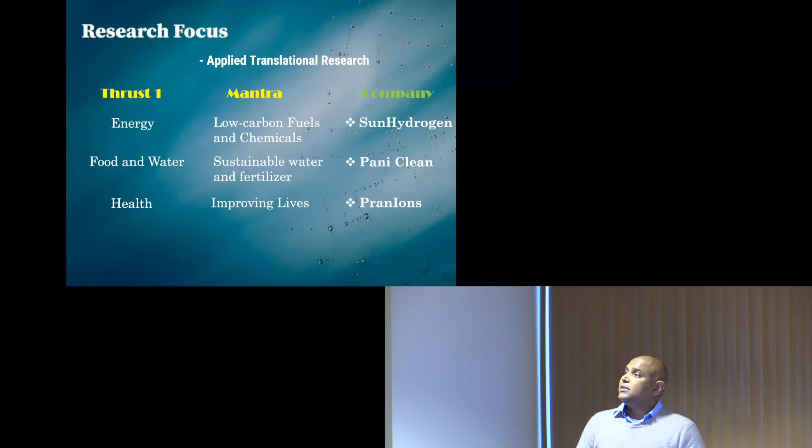So before I jump into the main topic of today's talk, I just wanted to advertise some of the things that we do in our lab. The lab is highly focused on doing applied translational research, and so we work on three thrusts.

I would say 50% of the lab works on thrust one, the energy, trying to make low carbon fuels and chemicals. The main focus there is hydrogen, and we have tried a little bit on some other chemicals like bromine and formic acid, but not much traction was received, so we stuck with hydrogen. Thrust two, the food and water, I would say 40% of my group works on that thrust area, and the goal there is to make sustainable water and fertilizer.

And the third, which I tell my colleagues is a mistake because I shouldn't be working on health because I'm terrible with biology or anything related to health, but I'm convinced that some of the skill set that we have in our lab, mainly the use of electricity to drive chemical reactions, can be used in the health sector as well. So we work on developing oxygen concentrators, mainly after the time of COVID.

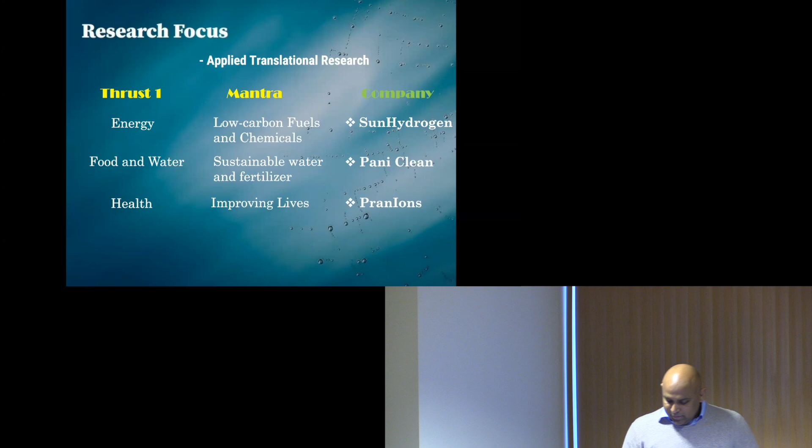So those are the three major thrust areas that we focus on, and the research approach in our lab is entirely based on this field of science, which is electrochemistry. And here is the currency note that was released in honor of Alessandro Volta, who invented this particular field. Basically, what he found in 1800 was if you use different metals and have some sort of alkaline water in between, you could either generate electricity, which became batteries, or you could reverse the process. You could supply electricity and do chemical reactions or transform things in water to something else. So he was credited as the father of electrochemistry, and rightfully so.

And he also happens to be a professor. And I think this was the first example showing the utility of a professor, because after his discovery, soon there was translational research happening in the field of commerce. Prior to that, any commerce activity was purely dictated by the industries. After this, new industries came into place: electroplating, electroforming, the aluminum industry. Aluminum cans are made using electrochemistry. Everybody carries batteries in their pockets. So this was the first example showing the utility of a professor too. Prior to that, nobody thought professors could have any use.

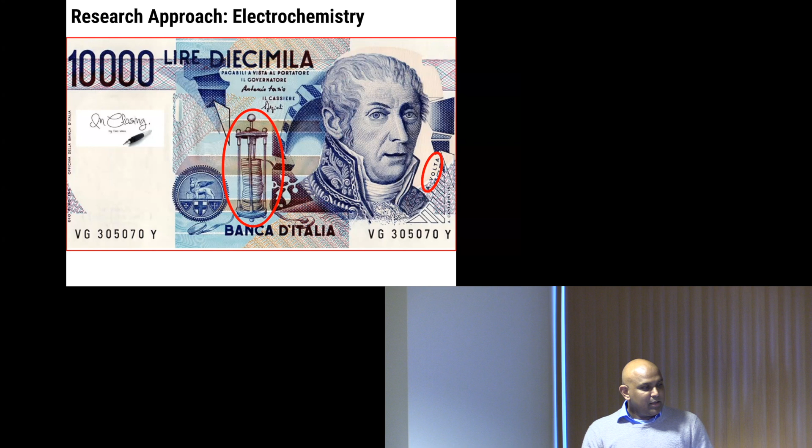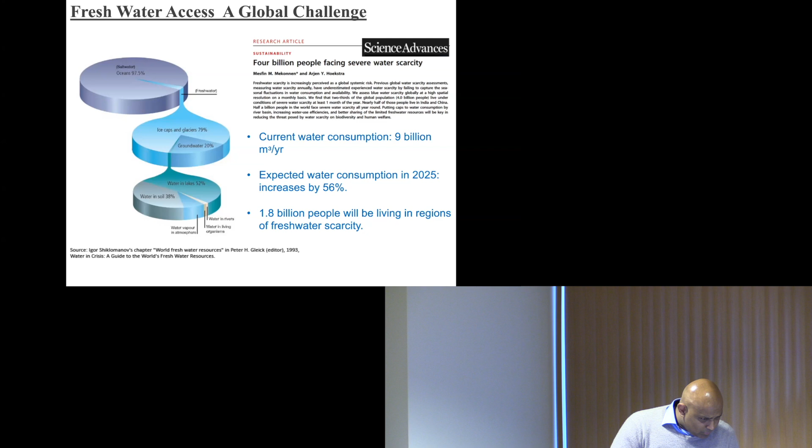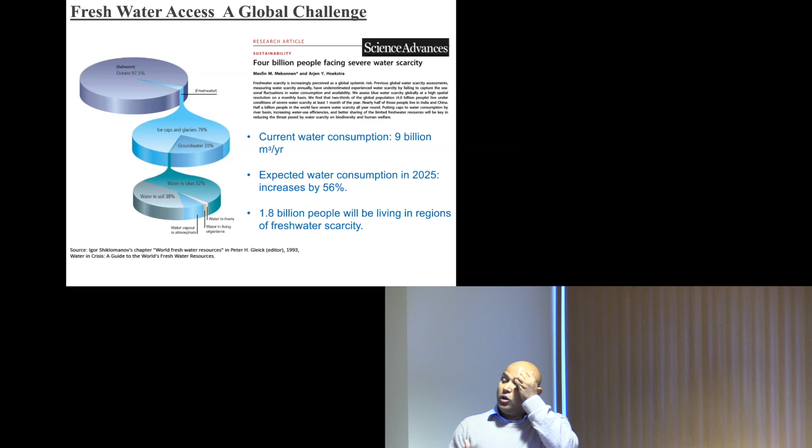And I just like to show this one slide. I don't have to preach to the choir in this room, but I like this particular article, among many articles that have discussed the challenges with freshwater access. The reason I like this article is because its predictions have been pretty good. This article was published sometime around 2016, and they made predictions about how much the water consumption would increase, and how much it would impact people.

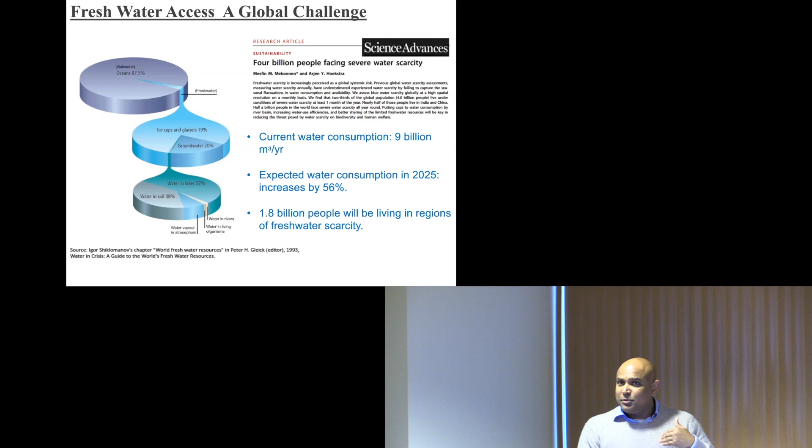And if you take the reports from 2023 or 2024 and look at the numbers, it matches quite well. So that's one of the reasons why I like this article, and I just wanted to showcase that sometimes predictions can be true as well. So everybody understands we have limited access to fresh water, and there are multiple solutions that have been implemented over a century to increase freshwater access.

And in our group, we focus on two major topics. Part one of this presentation will focus on the desalination technologies that currently exist, and whether there is a way you could improve the status quo of desalination technologies using the electrochemical approaches I just talked about. It was more of an exploratory undertaking, mainly from personal interest. I wanted to see if electrochemistry has any role in this process. If not, that's fine, but I would like to know that as well. So that's this part of the talk.

And when we looked at desalination, again, I'm not an expert or well versed in the environmental portions of the field, so I had to look around and see what currently exists.

It was a good snapshot of the current desalination facilities that exist across the US, and it gives the different technologies that currently exist. You have reverse osmosis dominating the market, and what we quickly found was the current desalination technologies do a really good job. Reverse osmosis is a beautiful technique that works very close to its thermodynamic limits from an energy efficiency perspective, right?

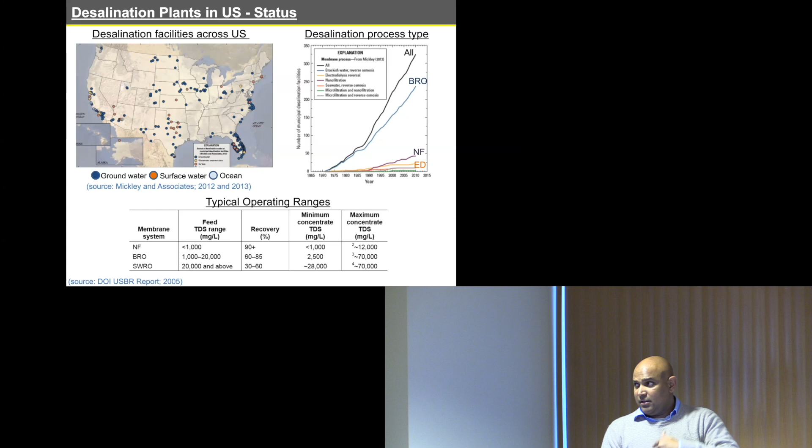So we looked at it, and we realized there is probably no need to bring a new electrochemical process for desalination alone. But then we looked at why it is not practiced everywhere. Why doesn't it exist at really large scale? You have a few large scale desalination plants, but why hasn't it been implemented in a much more rapid way? We did this program called NSF I-Corps.

I don't know if anybody has done that. So basically the program is when you bring in people from an academic setting and let them loose for 3 months, and have them talk to 100 people, minimum 100 people, and these 100 people should be from different stakeholders, could be industry people, could be the actual consumer, and so on and so forth.

So you're developing a product and you can't mention what product you're developing, but you've got to identify 100 people and talk to them about, hey, what is needed in desalination. In the exercise that we took, that was the question. We wanted to really understand what is needed in desalination technology, right? Because simply looking at the numbers from a thermodynamic standpoint, it didn't seem like there is a new need for the technology.

And one of the things that jumped immediately out of those 100 was more than half of them, and this was mainly industry players, mentioned that if we have a good concentrate management option, that would further push this technology forward. And that's where we looked at what are all the concentrate management options.

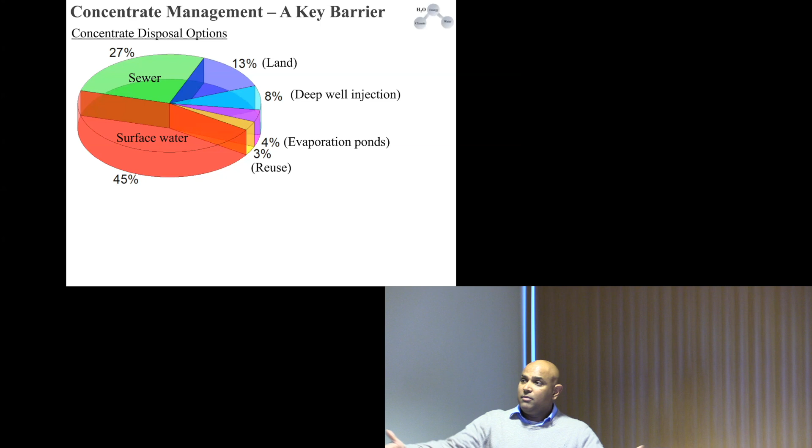So concentrate is basically: you desalinate, you get fresh water, but you're left with this concentrated salt or concentrated brine. And how do you dispose of it? In the coastal areas, it's fairly simple. People just dispose it into the oceans, and at least right now the regulations are not that stringent, but it is becoming stringent to just release it into the oceans as well.

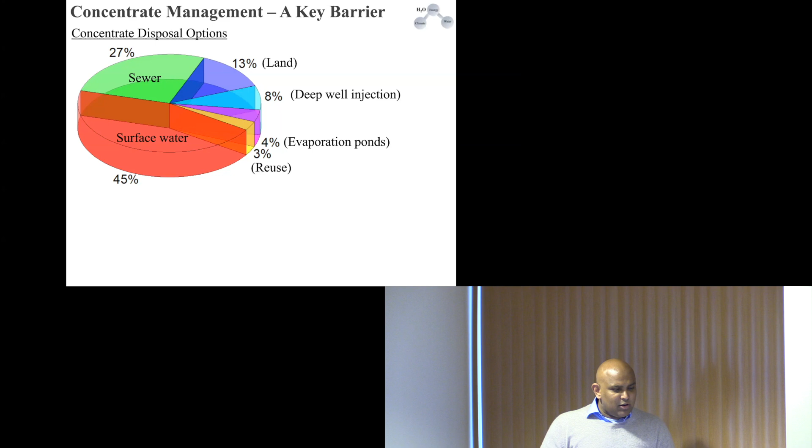Right. And what happens to the inland communities, and so on and so forth. So this chart gives all the types of concentrate disposal options that currently exist. And this was some of the take-home message that we had, which again, I'm not an expert, so I apologize if some of these take-home messages do not accurately reflect the current scenario, but this is what we have seen.

Sorry, but I will stop moving there, or just be here.

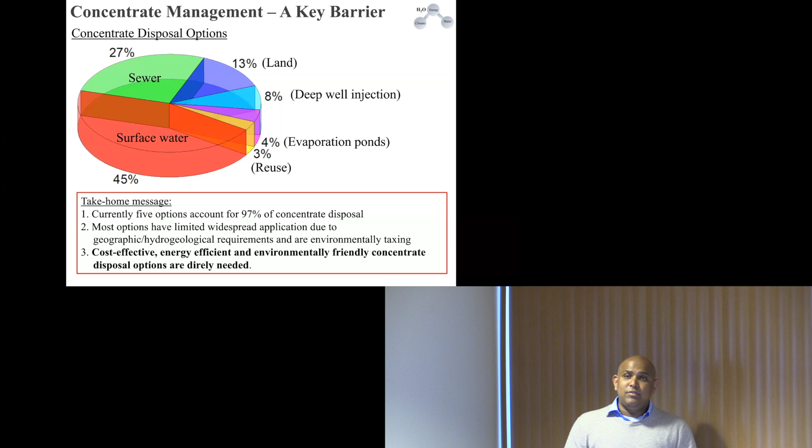So currently 5 options account for 97% of the concentrate disposal, and what we found was most options are limited. It's not easy to create these deep well injection systems or the evaporation ponds and so on and so forth. And so we thought, what if we could take that concentrate and do something useful out of it? Right? And that's this proposed solution. This was my first funded project as an assistant professor.

This was submitted to the Bureau of Reclamation, and the idea was to take an existing system that already is there and see how we could integrate a new technology, which would be electrochemical based, that takes in just the concentrate produced by this desalination method and turns it into something useful. Right? So the idea goes this way.

So the approach was, if I could take the concentrated brine, in this case I've simplified it, let's just assume it's sodium chloride rich brine, which is not far from what you would expect in brackish water desalination technologies, or even other desalination processes. So you have the sodium chloride rich brine. I know from electrochemistry that if I choose the right electrode, I could knock off the chloride ion in the sodium chloride and convert it to chlorine. And chlorine is a value-added chemical.

I know from my chemical engineering background, if I could generate pure chlorine, there is a market to buy that. So if I generate chlorine, then I have the sodium ions left over here, and if I have a negative electrode over here, the sodium ions would move to the negative electrode. And if I carry out a different reaction, say reduce water to produce hydrogen, I'm left with OH minus. So in order to balance the OH minus ions, the sodium ion will move and react with the OH, and I could get sodium hydroxide.

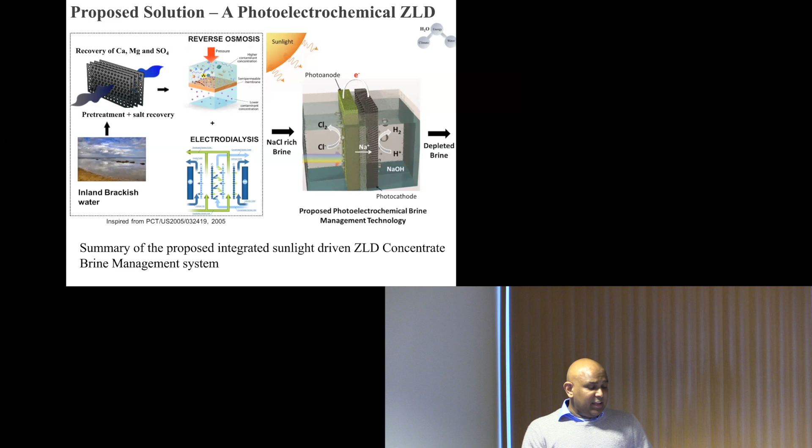This goes into a little bit more detail of what the exact reactions are, but I will skip this step. This is something that I explained in the previous slide. But there was one challenge, right? For each of these reactions to happen, in order to produce chlorine, I need some voltage to carry out that reaction. In order to produce hydrogen, I need some voltage to produce that reaction, right?

Now, if you think in terms of batteries, each battery provides certain voltages, right? You have the alkaline batteries, which are roughly 1.5 volts. You have the lithium-ion batteries, which are roughly 3.4 volts. Likewise, to carry out this reaction, you need roughly 2 volts, right? So I need to find some sort of arrangement which could get stacked up and provide the necessary voltage.

And semiconductors are typically used for these purposes; you have a range of semiconductors. Semiconductors would go from titanium oxide, which is something that you use for your sunscreen. It could provide around 3 volts. That's the reason why it's used in sunscreen, because it will absorb sunlight and get excited carriers, and it would prevent it from reaching your skin. So that's the reason titanium oxide or zinc oxide is used in sunscreen.

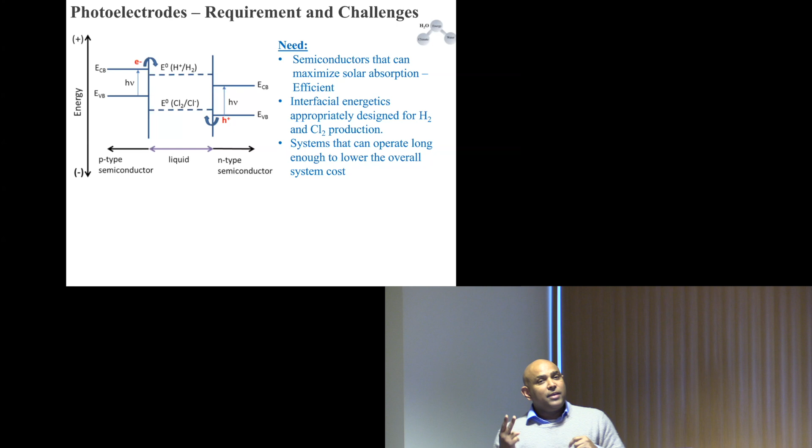But I can't use that over here if I have to maximize the sunlight, because I wanted to use enough spectrum of sunlight, not just the UV spectrum, right? So the type of semiconductors that I have to use should be producing voltages of roughly 1.5 volts, which means I need two semiconductors to carry out this process, because I need minimum 2 volts. So that was one of the challenges.

So how do I have two semiconductors identified? One semiconductor should do the hydrogen production, the other should be doing the chlorine production. And these semiconductors should be stable, because they are going to be immersed in a concentrated brine solution. And the overall motivation of this technology is to hopefully lower the cost, because cost is one of the key challenges to come up with concentrate management options.

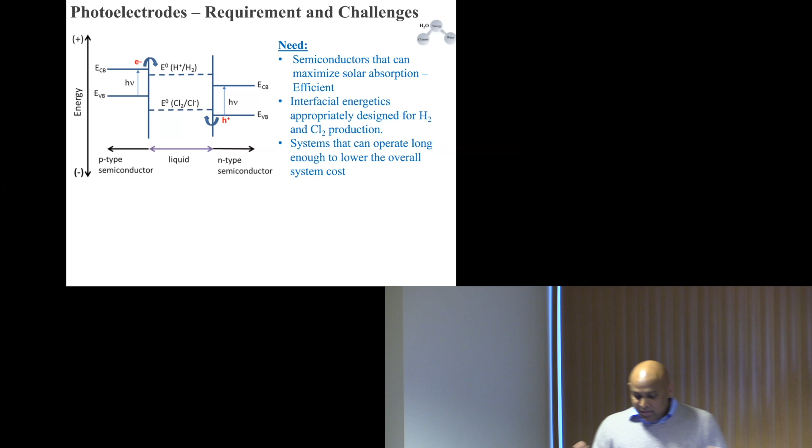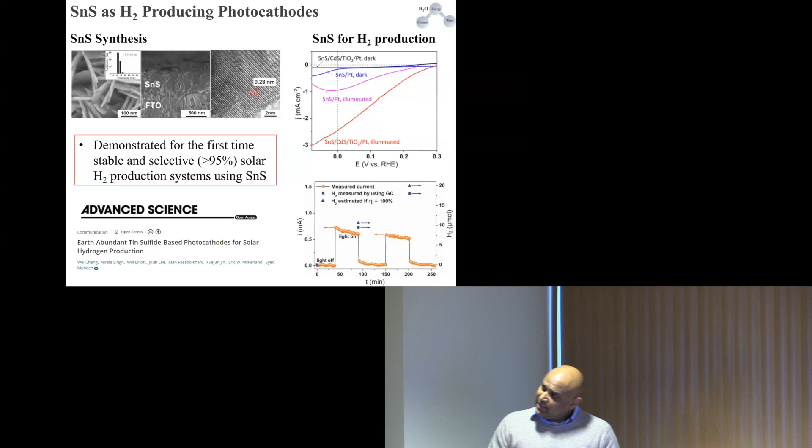So the material that I should be making should be dirt cheap, and if it has to be dirt cheap, then it has to be made with dirt, and preferably local dirt, so that we don't get tariffed. So that's a challenge with this. So we came up with two approaches. For the hydrogen producing process, we developed a material called tin sulfide. We like this material mainly because the sulfur, when it's attached to tin, makes it extremely stable for the water chemistries that we are trying to do.

So tin sulfide is a good semiconductor. A semiconductor is something that takes in sunlight, produces energy, and you could use that energy to carry out the reaction. So the first goal was to make tin sulfide based systems. We have abundant tin, we have abundant sulfur, so this makes sense. And what you see in this snapshot, without going into too much detail, is it works. We are able to use tin sulfide as a semiconductor to produce hydrogen from these systems.

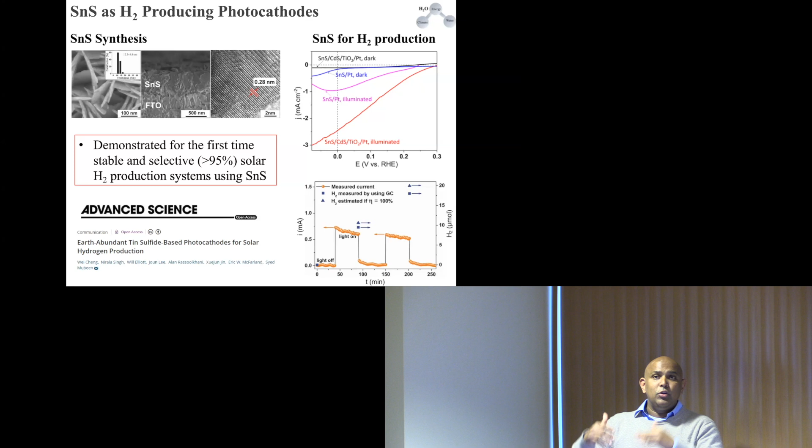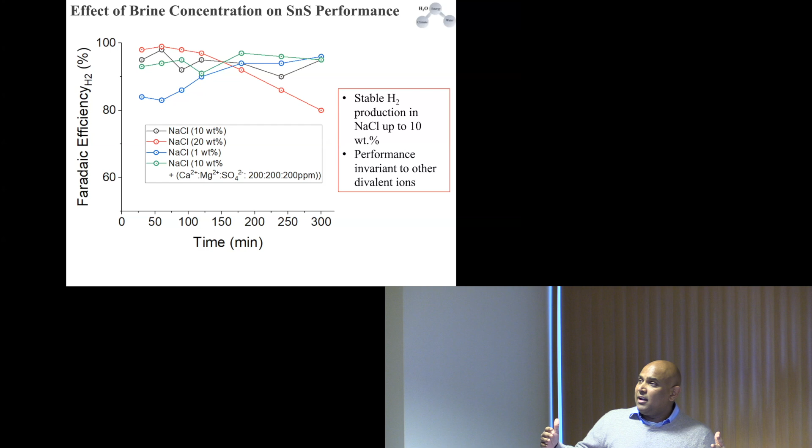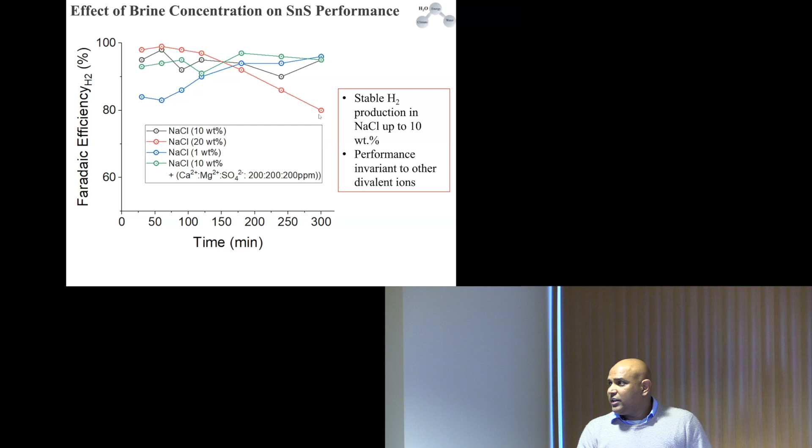If it's not horizontal, if it shows a downward trend, that means it's not stable. So ideally, you want a material that's 100% and remains stable. And that's the ideal curve. We were able to get, for up to 10 weight percent, similar performance of 90-95%, which is pretty good for a system of this nature. But at 20 weight percent, we did see a decline in its performance.

Now that was on the hydrogen side. We need to do the same on the chlorine side. And for chlorine, again, we chose a material system that's abundant, low cost, and we came up with bismuth vanadate. Although, I have to admit that vanadium is not an abundant material, so that's the closest that we could get. So bismuth vanadate again was a semiconductor material.

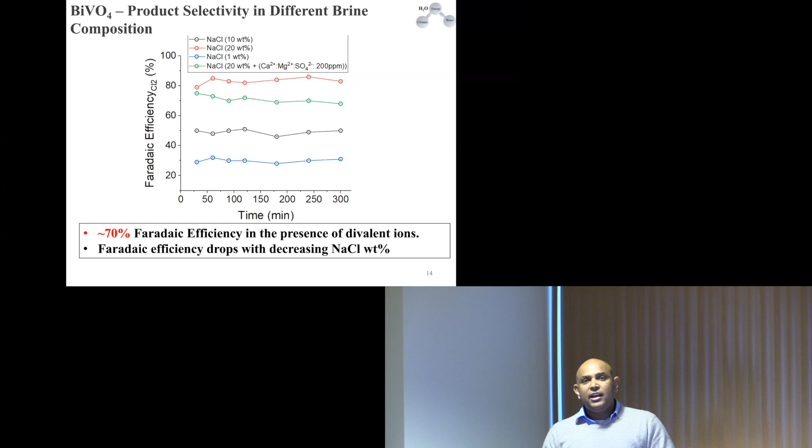Now, again, the motivation was to see if this technology would be useful to be integrated in existing desalination units, desalination systems, and I was very much interested in doing translational research. So cost economics becomes a key factor. So we did some preliminary techno-economic analysis, working with some industry partners to understand where the system would go in, what would be the cost targets that they are looking for, and so on and so forth.

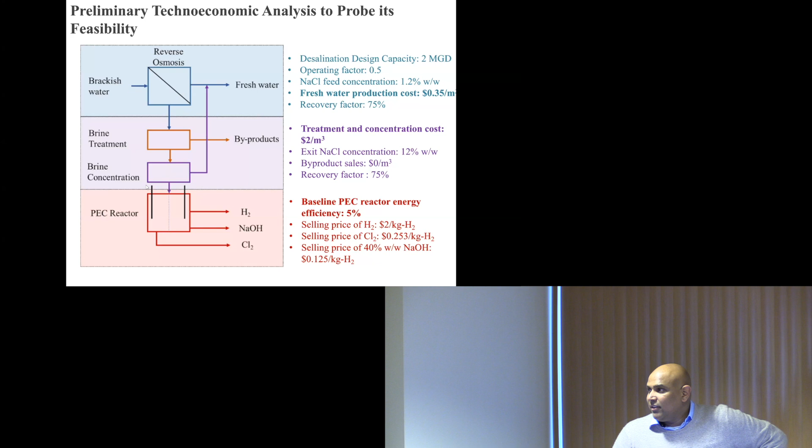So this gives a snapshot of a simple block flow diagram of where this system would be. The system would be over here, which we call PEC. PEC stands for photoelectrochemical. So most of the desalination facilities' systems end over here, but we needed to add some brine treatment because we realized quickly that while these systems are stable in the presence of calcium, magnesium, sulfates, the system is not very stable if you have a little bit of bromide present in it, and a few other ions. So we needed to do some brine treatment, and then have the water fed to the PEC system.

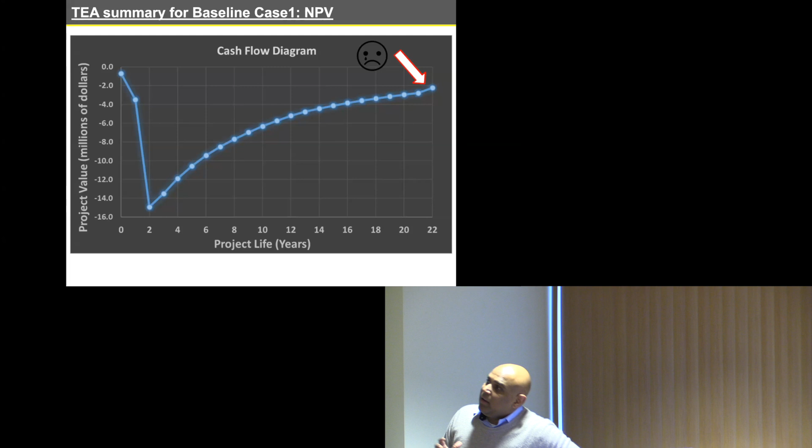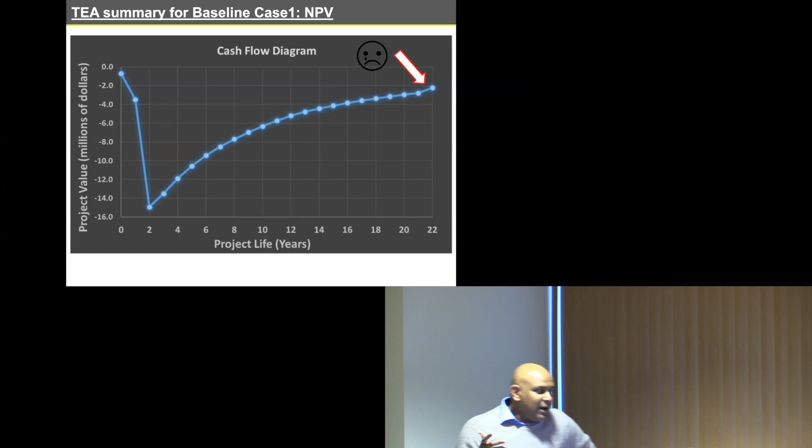So let me just quickly show you the result. Based on our current performance metrics, we simply did what a cash flow diagram would look like. Basically this is showing if you build a company based on this, and if it runs for 20 years, is it a profitable venture? With current performance metrics, with current cost of the materials, even though the materials were indeed cheap, you've got to build all the necessary bells and whistles around it. You have to have the proper units, the housing units, the support structures.

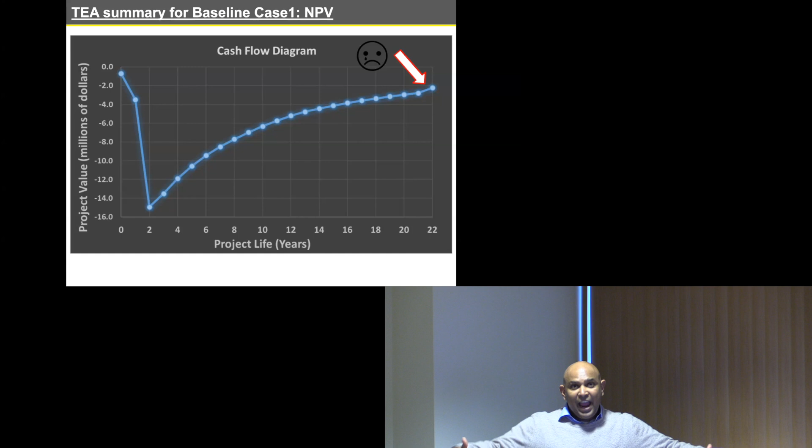In fact, the major cost was the support structure on which these reactors would be installed in large areas. And the challenge is sunlight is diffuse, which means for large-scale desalination facilities, you need large areas of land, which means large areas of these reactors need to be built. And the cost was pretty significant and did not show a profitable venture.

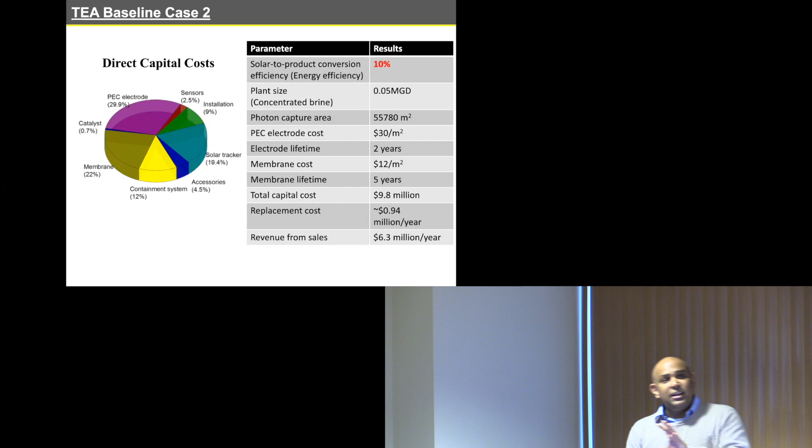It did become profitable if the efficiencies rise to 10%. What I mean by 10% is if I could use 10% of the sun's energy and convert that energy to do these chemistries from concentrated brine, then it becomes successful. But we haven't found a cheap enough system, or on the same material system, to go beyond 4%. I think 4% is the best metric that we got at a small lab scale. We tried to do a large scale unit and the efficiencies dropped.

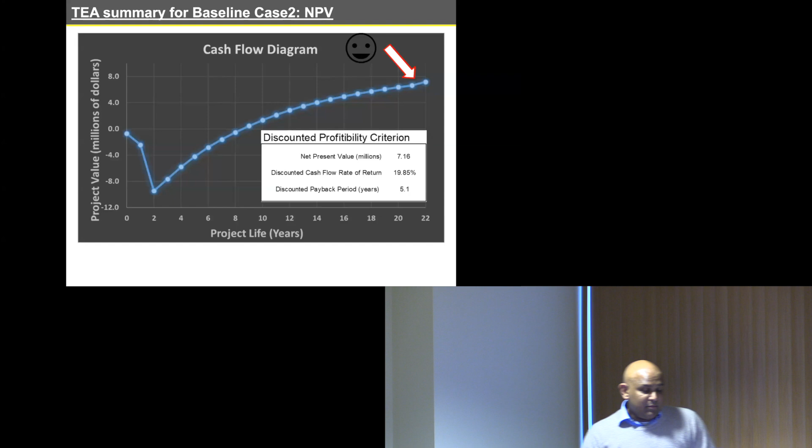So it's a good self-realization that there exist a lot more challenges, and clearly, my research group was not adequate to fix those challenges. You really need to increase efficiency and keep the material cheap. We did show that efficiencies can be improved. We chose materials which are highly efficient semiconductors, and we did show that we could get 20%. So the efficiency metric can be achieved.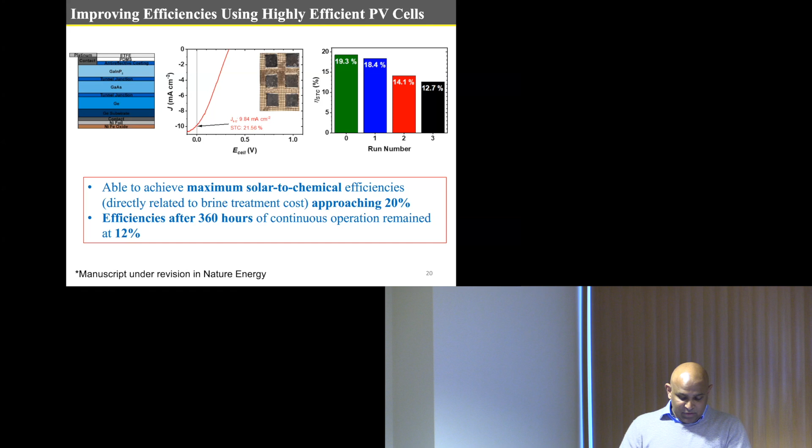But the problem is these materials that I show over here are only used for space applications, which means they are very expensive, not good for terrestrial use, so it won't work. But this is just to showcase from a lab scale perspective that we could achieve high efficiencies, hopefully if someone is interested, we could bring the cost down.

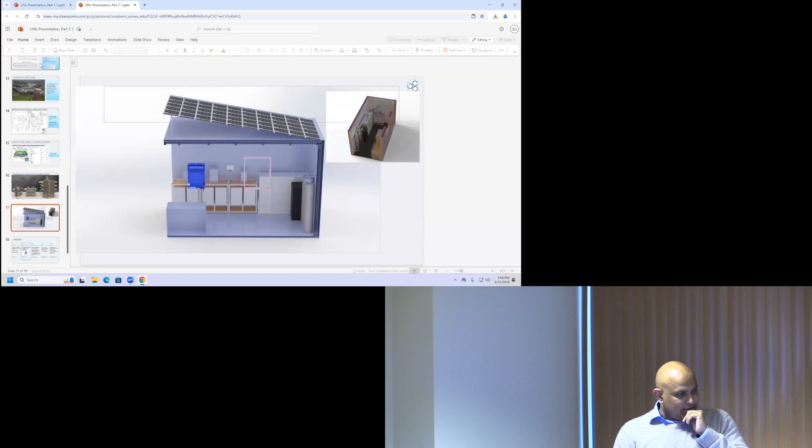So I will end this part. I have the second part of the talk over here, but as I transition, if you have any questions, please feel free to stop me at any point.

So this project is on how to take nitrates from impaired waters and make value-added resources from them. Right? So for this project, as I will show you, the economics was much more reasonable, and as a result, we did form a company, that's Paniclean. June mentioned over here, Dr. June Lee, she is the founder of Paniclean.

And we have worked very collaboratively with universities, but also with other industry partners like Ideal Energy. I think they are the largest solar installers in the Midwest, who are helping us build containerized units powered by solar cells that can take in impaired waters rich in nitrates and produce something valuable.

The problem of nitrate is something that I never focused on until I came to Iowa, where we were told by my environmental engineering colleagues that you need to have some RO systems, because the place where I was had a private well, and the private well did have nitrate levels sometimes during the agricultural season reaching close to 25 milligrams per liter, or 25 ppm, or higher. Right, so that's how I came to realize that nitrate is a big issue.

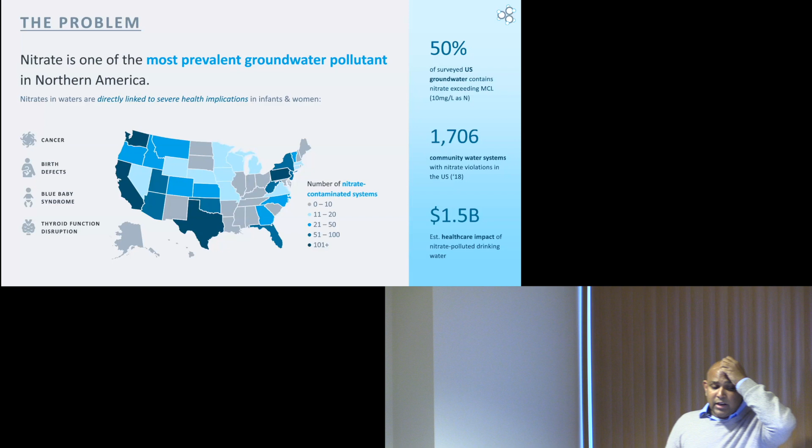It's the most prevalent groundwater pollutant. And you could see the numbers on the right-hand side, basically saying 50% of surveyed U.S. groundwater contains nitrates that exceed the limit, which is 10 ppm as N. And when we looked around, again, we did another NSF I-Corps program for nitrates, same thing, reached 100 customers, again, to understand where the market lies.

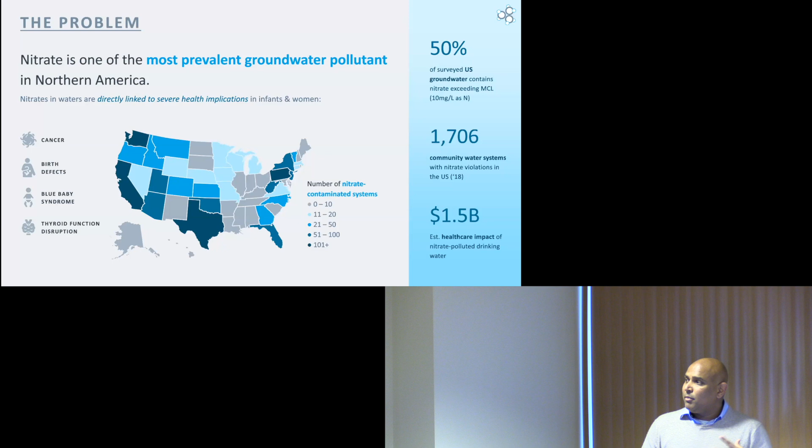We found that there is an immediate market, because you have 1,700 community water systems violating the nitrate limit, and as a result they do pay fines, right? Or at least that's what we are told. And it's also been shown that you have a healthcare impact, because nitrates lead to blue baby syndrome, thyroid function disruption and so on. So you have a $1.5 billion healthcare impact that's being projected because of nitrates.

And so we looked at what techniques exist. Again, reverse osmosis and ion exchange do a really good job. They can remove nitrates from your water. I have an RO unit in my home. The Des Moines Water Works has 6 ion exchange units to treat nitrates before it releases water back to the river. And so RO and ion exchange exist and do a fantastic job.

But again, the problem here is concentrate management. Just like brackish water desalination or seawater desalination, the problem is, what do I do with the concentrated nitrates that we have? So we got some numbers from the ion exchange plants around the US, and we were told roughly 70% of the financial burden is from the ion exchange resin regeneration process, and the brine disposal cost varies, but on average it's 36 cents per 1,000 gallons in inland.

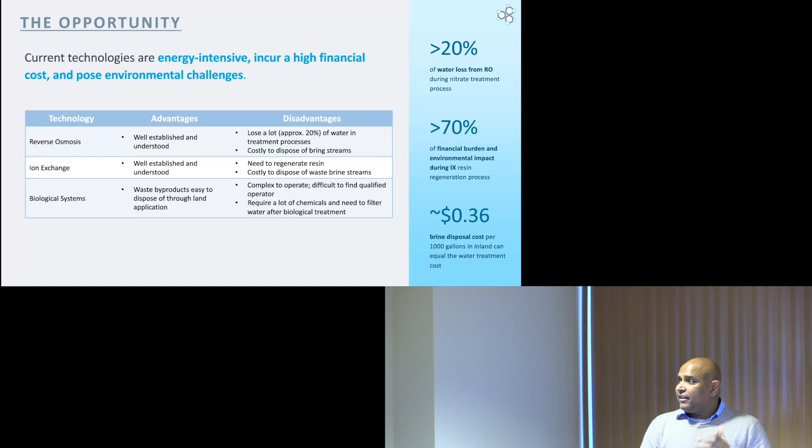So again, here the only trick that we know is to use electrochemistry. So the idea is to see if I could use electrochemistry to transform these pollutants. Right, and one of the things was to see if I could take nitrates and nitrites and use the electrical field and the rest of the ions in the water to produce something valuable.

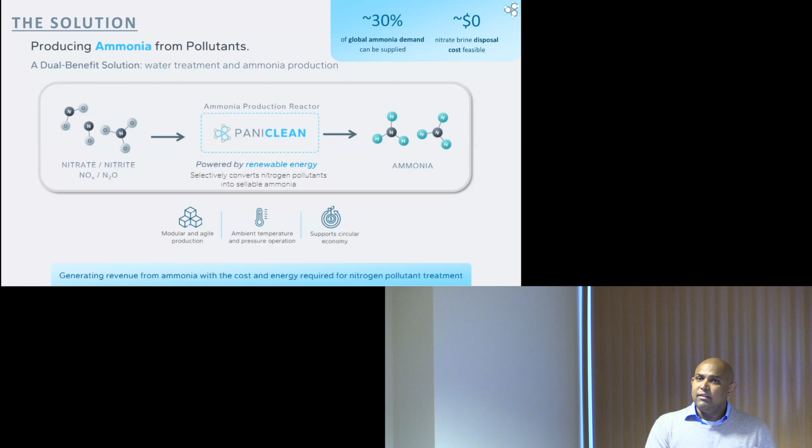We looked at ammonia because it made economic sense, especially when we consulted with some of the ion exchange plants like the Des Moines Water Works, because one methodology could be that they pay us to take the concentrate from them, and for us to make money, we need to make something more valuable, not just treat it. So that's where ammonia comes into the picture. Right? And it's a significant amount. Globally, 30% of global ammonia demand can be supplied using nitrates in water sources.

So the solution works this way. And the challenge with an electrochemical system is you've got to have concentrated pollutants. Right? If the pollutants are not in concentrated amount, most of the electricity would be wasted as heat or doing secondary reactions. That's the challenge. Right? So if you have large amounts of pollutants, electrochemistry becomes a very attractive field to treat them.

But of course, nitrates, 20 milligram, 30 milligram is still very, very small when it comes to electrochemistry. You need something in terms of 100 milligram per liter of pollutant. So the first step is we have to either work in unison with an ion exchange plant or an RO plant that treats nitrates, take the concentrated nitrate from them, use it in an electrochemical system. In this case, it's an electrolyzer.

And I don't know if you have been following the hydrogen industry or the hydrogen boom that happened during COVID. It was the expansion of these electrolyzer industries. These industries were planning to produce hydrogen, which can then be used in your fuel cell car. So the technology is very similar to that, but in this case, you'll be producing ammonia and not hydrogen, and you'll be using nitrates as the feedstock.

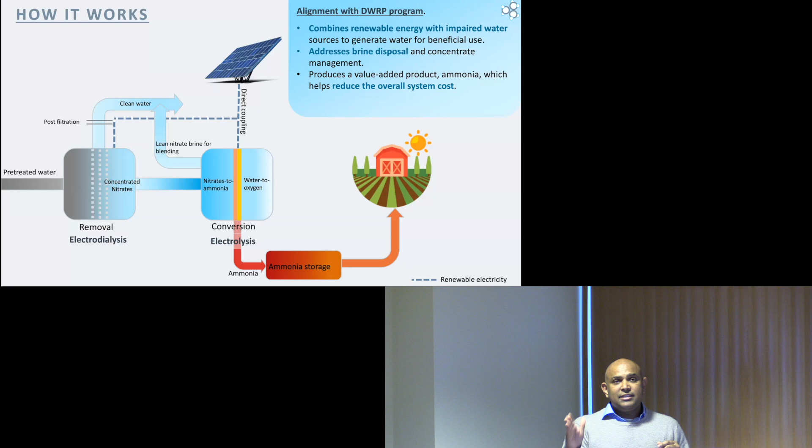So if you have nitrates as the feedstock, if it enters this electrochemical system, on the reduction side, nitrates will be converted to ammonia, and on the positive side, water will be converted to oxygen, and you prevent the ammonia moving from the left side to the right side by having semi-permeable membranes or ion-selective membranes. In this case, we use something called a bipolar membrane, which allows ammonium ion to pass from the left side, but it doesn't let it go to the right side. So you get a concentrated ammonia stream in the middle. Okay. And then we take it for ammonia storage and so on and so forth.

I don't have to tell the social impact clearly. If it makes more economic sense, it helps in decentralizing water systems and ammonia production, which has been a big push. While ammonia is cheap in the US, we roughly pay $400 per ton of ammonia production. In other parts of the world, it's a highly volatile commodity because ammonia is produced from natural gas, and the natural gas reserves dictate the ammonia production. So, for example, in many parts of Africa, the cost of ammonia production is over $1,000 per ton, and in the US it's roughly $400. In Japan, it's very expensive just because they don't have the natural gas.

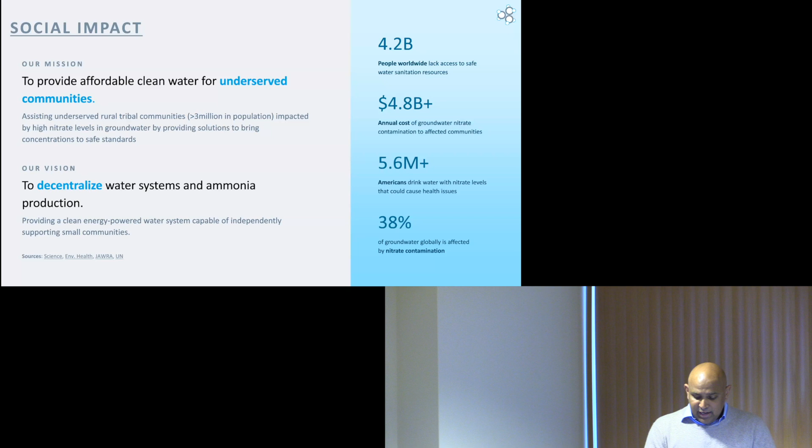Likewise, in Europe, especially in Germany right now, it's very expensive because the natural gas resource has been cut from Russia and so on and so forth. So people are trying to identify decentralized systems to produce ammonia, maybe in a small form or in a large form, using the feedstocks that are currently available out there. So that's the social impact that we envision.

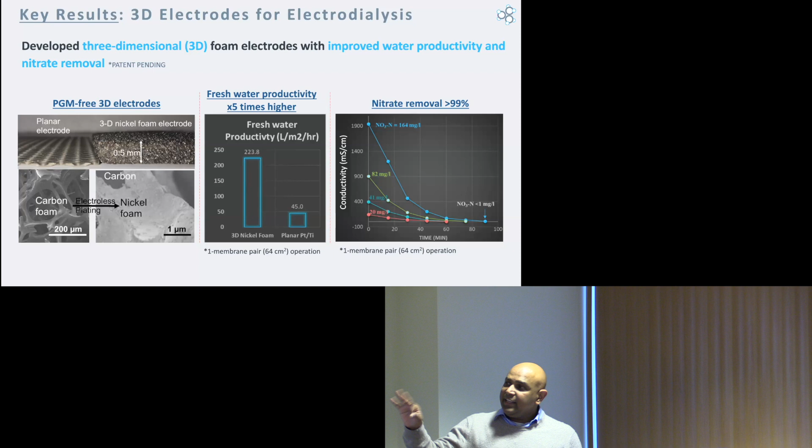Again, here I would just quickly go through what the main finding is. So one of the findings is you have to remove that nitrate first, or concentrate nitrate. And for that, we developed a sort of 3D electrode system. What I mean is three-dimensional electrode systems that could capture nitrates, right? So that it gets concentrated in its system. So it's almost like the carbon filter process. So it captures all the nitrates. And then if you have catalyst loaded on these electrodes, I could then apply electricity and convert that nitrate to ammonia. So that's the principle.

We call it a bait and switch approach. Basically, the bait is you apply a positive potential, so the nitrate, which is negatively charged, will come towards the positive electrode. And if you provide enough surface area, they remain there. And then you switch it, which means you switch the polarity from positive to negative, and the negative polarity enables conversion of nitrate to ammonia. So it's like a bait and switch.

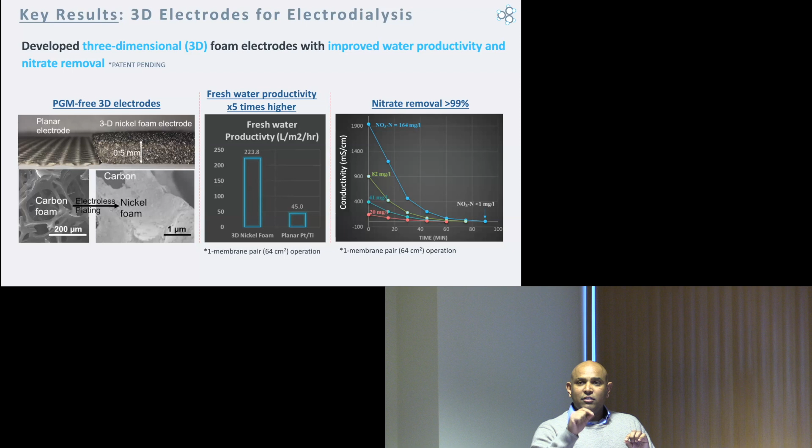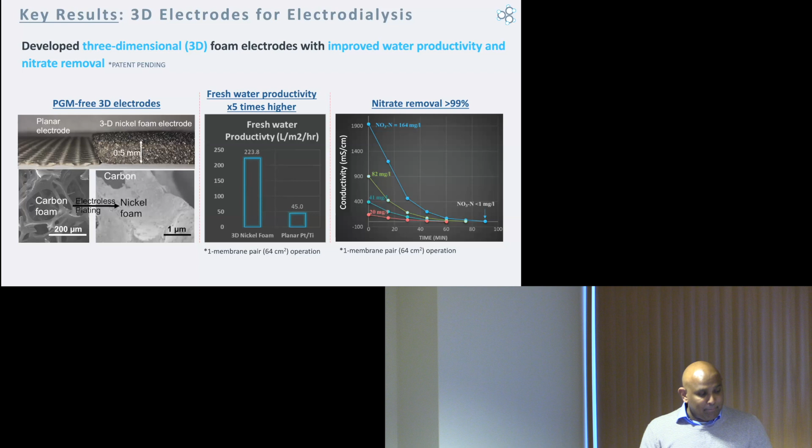So this slide gives the take-home messages. We were able to identify some 3D electrodes that enabled a good nitrate capture process. This particular slide talks about how, once the nitrate is captured, the carbon does not transform nitrates to ammonia. It just captures it. You need something else to transform the nitrates to ammonia. We identified copper with a little bit of titanium in it, which was able to selectively convert nitrates to ammonia.

Again, we could play with the metal over here and could convert nitrates to nitrogen gas as well, because that was another project that we worked on where the stakeholders were more interested in just destroying nitrate, and they wanted just nitrogen out of it. They didn't want to deal with ammonia because that requires a specific infrastructure. Not every stakeholder wanted ammonia, they just wanted to destroy nitrates. So you could play with these materials, and we do have a material combination that can convert nitrates to nitrogen. But what I'm showing over here takes nitrates and converts them to ammonia.

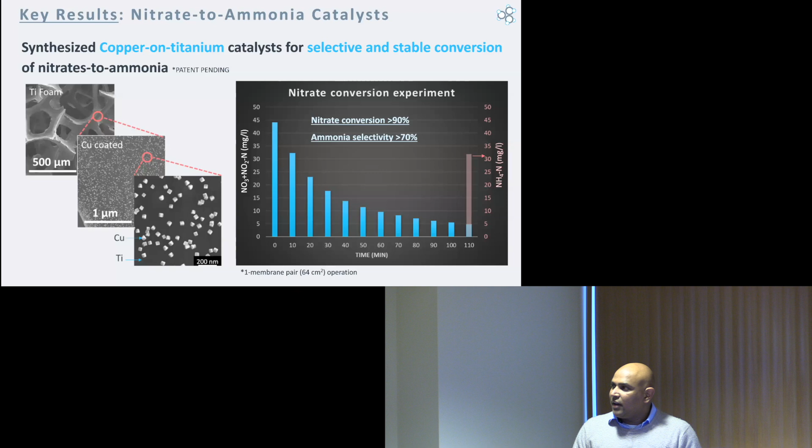And then what you see here is we are able to start with something like 45 milligram per liter. That's the amount that we were able to concentrate from; I believe the feedstock was roughly 10 milligram per liter or 15, I don't recall. We were able to concentrate to 45 milligram per liter, and we were able to convert it into ammonia. So we were able to achieve roughly 90%.

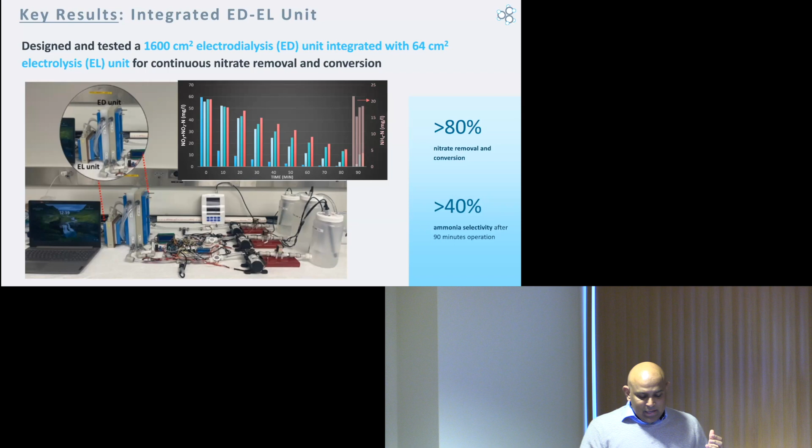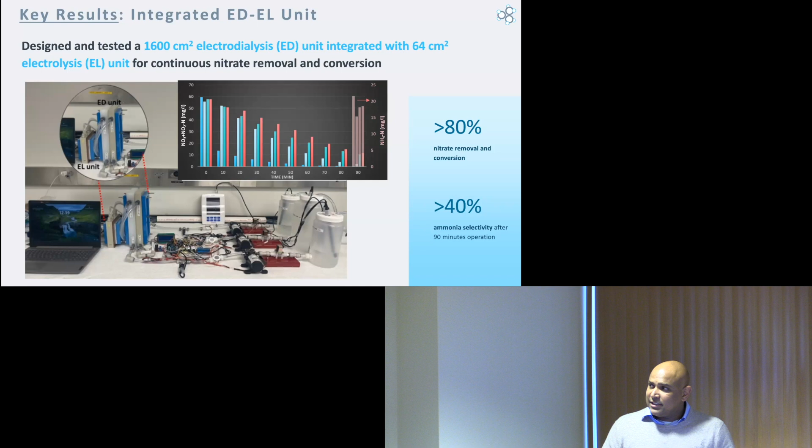For all systems, we were able to achieve over 80% nitrate removal and conversion. And the unit is shown over here. This is your concentration unit, and this is the conversion unit. These are all the control systems for the necessary sensors to monitor what's happening in real time. So this was all done in simulated waters.

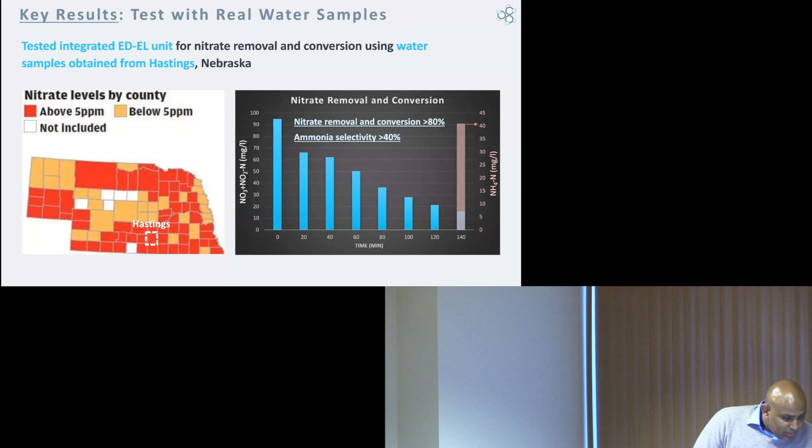But then we reached out to the city of Hastings in Nebraska to obtain the RO reject that they have from the nitrate treatment facility. All right, I'm assuming I'm showing the city of Hastings in the right location. The city faces a lot of nitrate pollution. They have multiple technologies to treat nitrate, and one of them is use of RO systems.

So we went to them, we took their RO reject and tried to see what happens if I take the RO reject and feed it into this particular unit. And that's the results shown over here. The RO reject had much higher concentration, roughly close to 100 milligrams per liter. And we did not do any pre-treatment. It was the reject directly obtained from the RO nitrate treatment system, directly fed to the unit.

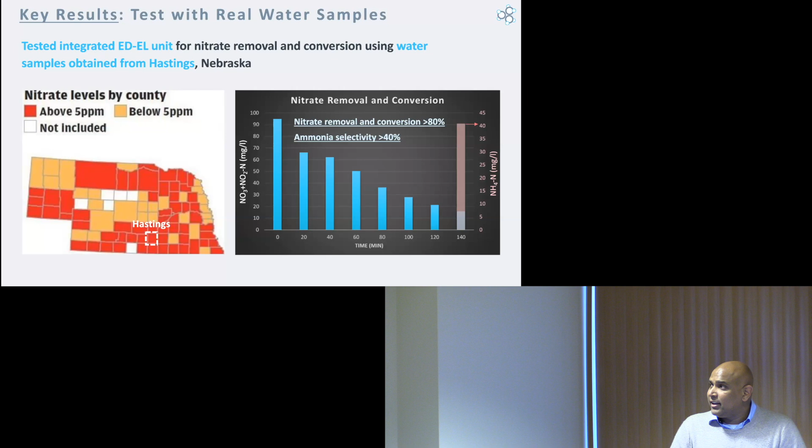And we were able to achieve nitrate removal and conversion of greater than 80%. The selectivity was slightly down, 40%, mainly because the presence of other ions does interfere with the selectivity. So we were able to achieve selectivity of greater than 40%, but we were able to destroy nitrates greater than 80%. Now, based on that, we developed this prototype as part of a deliverable for a USDA project.

The deliverable was, it needs to be an all-in-one unit powered entirely by renewable electricity that can be off-grid. So this is the first prototype, which is a 300 gallons per day system. It involves all the necessary bells and whistles, so that you could directly feed it an RO reject or water that has higher nitrate levels. And the unit is built in such a way that it's like a one-touch system.

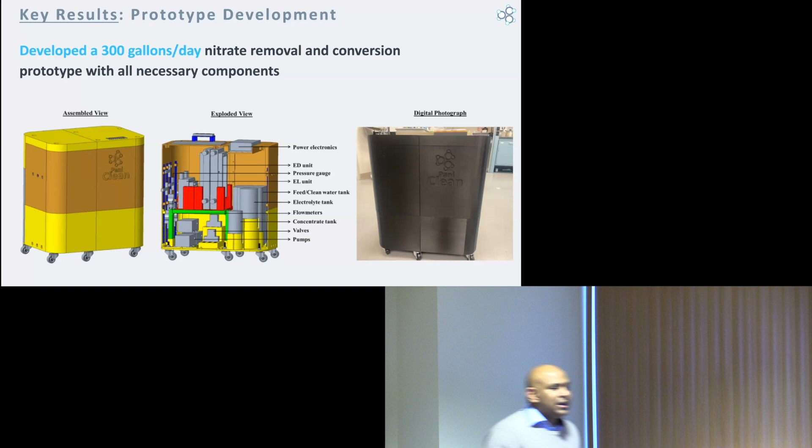So you turn it on, it measures the nitrate concentration, it adjusts the necessary voltages and the necessary power that needs to be delivered from the sunlight, does the nitrate removal, produces ammonia and stores the ammonia, and then stores the clean water. So that was this particular unit, 300 gallons per day. That gave us a little more confidence, because now we have all the necessary bill of materials to do the costing. So we did the costing, and we quickly realized that the nitrate concentration plays an extremely crucial role in determining the cost.

As you can see, once we exceed close to 250, 500 milligrams per liter, we become competitive with green ammonia processes in the US. And if you have to reach the Haber-Bosch process, the traditional process for ammonia, you really need really high nitrate concentration. So that was good, because then we could work with customers who have such high concentrations. This tells us I can't use this technology on agricultural runoff, because it's very dilute. It can't be used there, but can be integrated with something else which concentrates it.

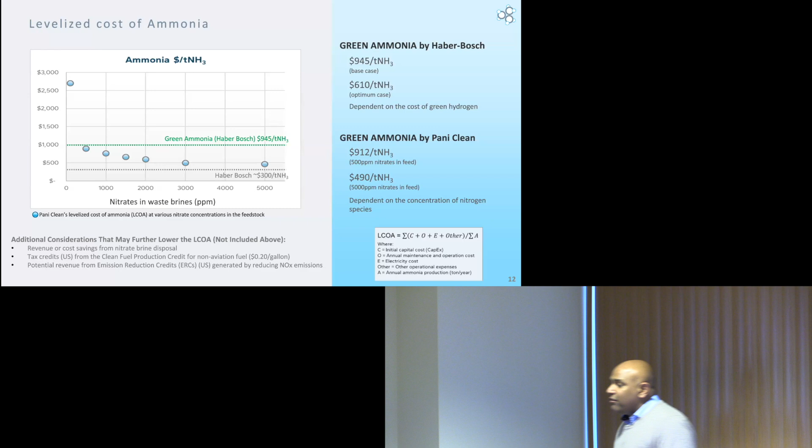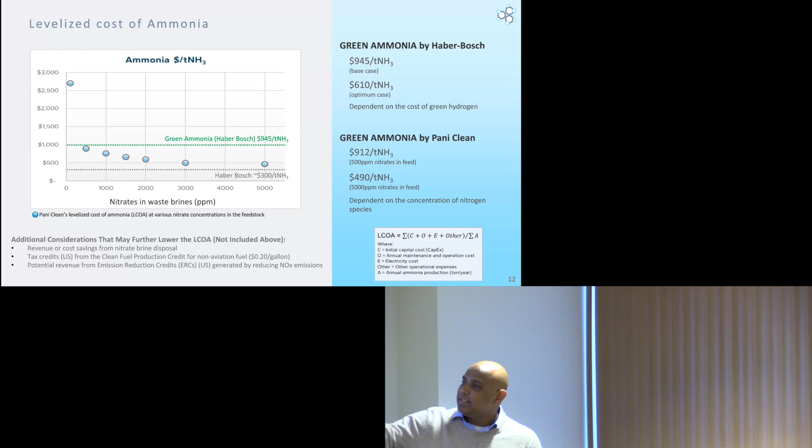So the ongoing work: obviously we wanted to expand the scale. We are currently doing pilot testing in Iowa at the wastewater tech park, which is integrated with the water resource recovery facility. And the nice thing is, we could tap nitrates from two places in this facility. One, right after the effluent from the bioreactor.

There the nitrate concentration is really high, which is greater than 500 milligram per liter, but it also has all the crap that comes along with it. So it will be a good test bed for us to see how the technology would work with such waters. They also have effluent that comes out of the treatment plant, and it varies sometime between 10 to 20. And when it's 20, the process is to blend and bring the concentration to 10. But we are trying to see if we could take that water stream and use that.

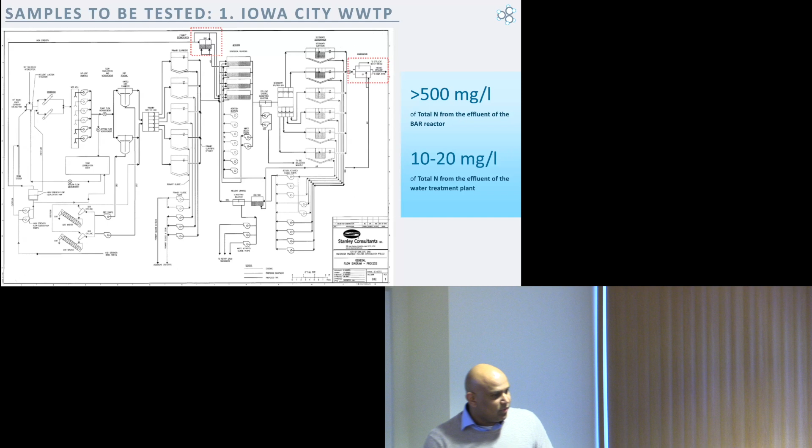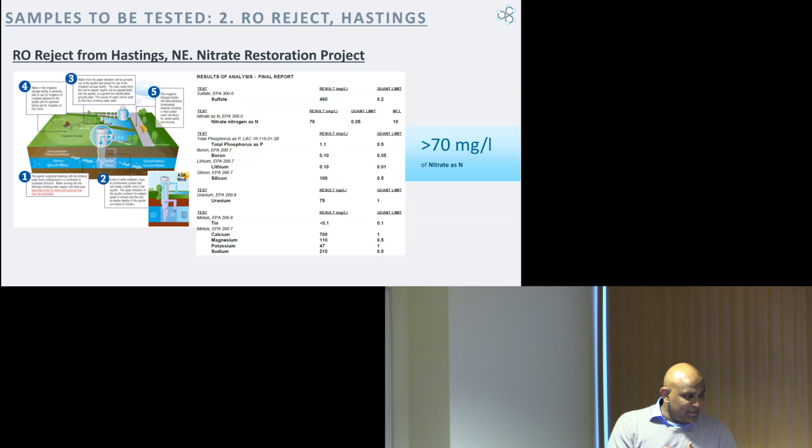The nice thing about electrochemistry, just as you would appreciate in your phones, is the footprint is small, right? The electrochemical systems can be made smaller and compact, and that's the advantage of it. So where real estate is a problem, electrochemical technologies could be highly useful.

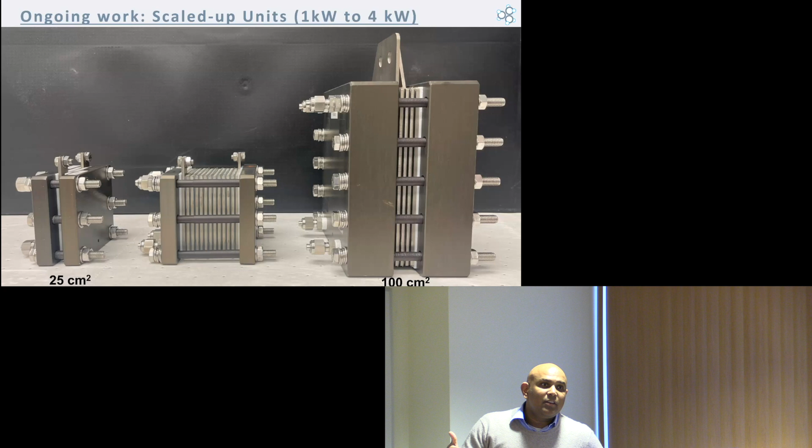In terms of power, what you see on the right is a 4 kilowatt system, and basically can treat 1,000 gallons per day of water with nitrate concentrations of 100 milligram per liter. So if you have 100 milligram per liter of nitrate, you could do 1,000 gallons per day. If the concentration is lower, you could treat more, because the power is dictated by the nitrate concentration, right? And then if the nitrate concentration is high, then the gallons that you could treat goes down.

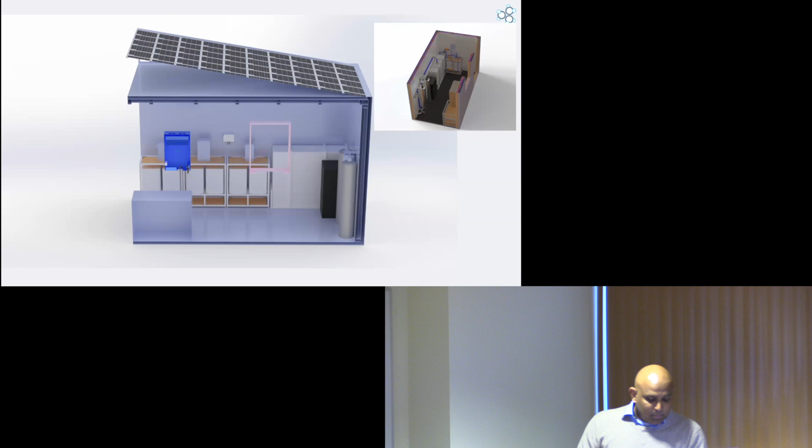This is a containerized unit that's ongoing. We are still waiting for our solar. This is a rendered image. It doesn't look that clean inside, but it's a rendered image, and everything is installed except for the solar panels, the inverters, and all the necessary things to run this process.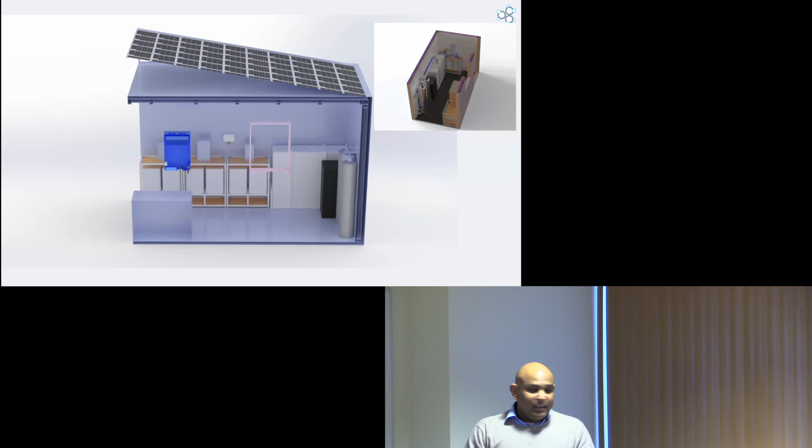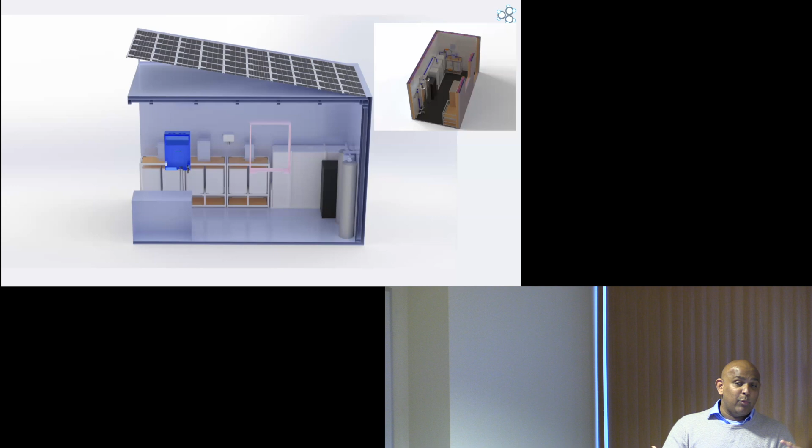And this containerized unit can be directly fitted to the water that's coming out of the treatment plant or to the RO reject. We have some pre-treatments there if needed, or it can bypass the pre-treatment, directly go to the concentration conversion unit, and we have an ammonia storage, ammonium, I should say, it's a liquid ammonium.

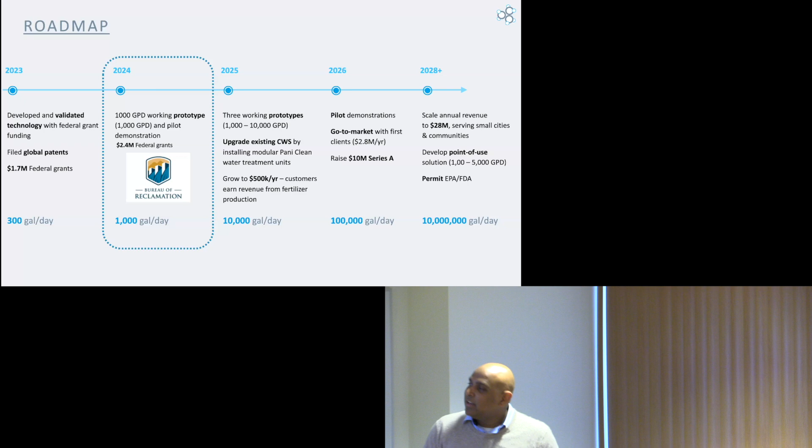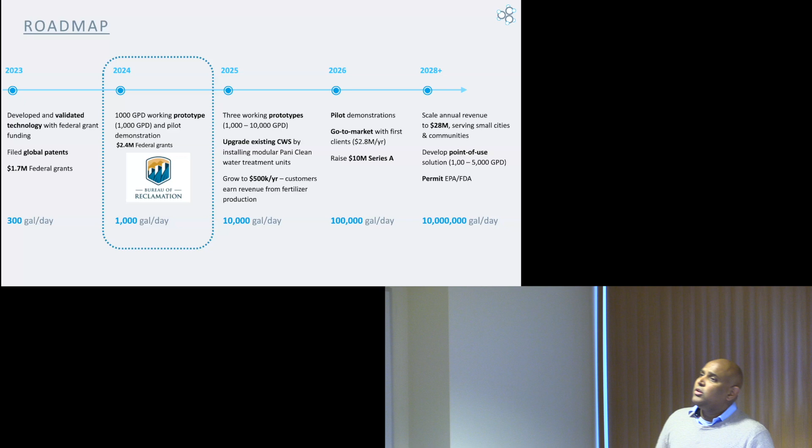And here is the roadmap where we are. We just finished the 2023, so right now we are at 1,000 gallons per day. We have an ongoing project, not sure if it will go to the next phase. The funds are currently frozen. But that project is to scale from 1,000 gallons to 10,000 gallons per day system. So basically, just going up higher. But currently, we are in line to test our 1,000 gallons per day system, funded mainly through USDA and the US Bureau of Reclamation.

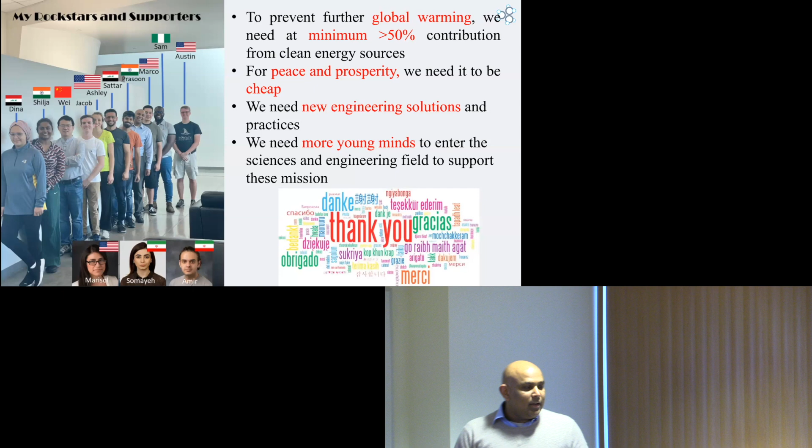So with that, obviously, none of this is what I did. I just speak. So those are the folks, and one of the things that I'm really proud of is all my PhD students and postdocs, we come from diverse background, because I strongly believe that you need to have different expertise and experience to solve these problems. And none of them over there are also electrochemical engineers.

And then I do a test when I have a student join. I give them a battery, those flat batteries, where you can't tell positive and negative unless you look at it. It's not the one with the tab. And I ask them to tell which one is positive and which one is negative when I remove the cover. Most often they fail, and I take them in, because I think they come with a completely different out-of-the-box perspective, and that has been very helpful in solving the problems that we do. Because I am too much in electrochemistry and I miss the big picture or the other solutions that are available.

All right, so that's my end spiel. Global warming is a challenge. You need clean water and energy, and it has to be cheap. That's one of the reasons why all the projects that we do, we start with doing some economics. If it's not cheap, the likelihood of us carrying this out is very low. Yeah, that's pretty much it.

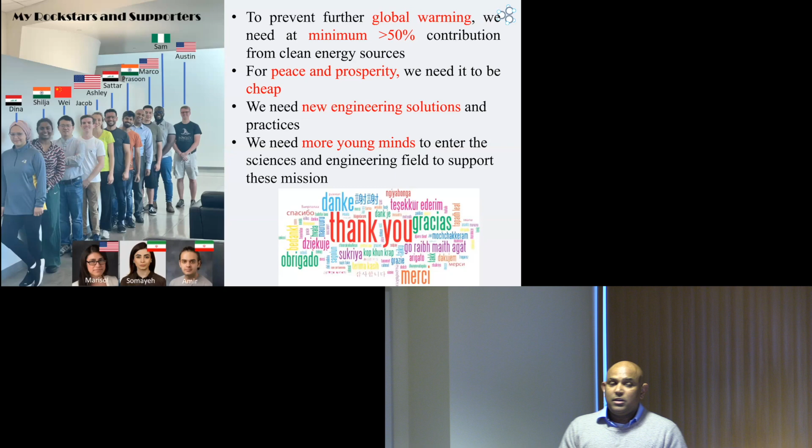I was wondering, for the 2025 year plan, the roadmap, what are your plans for this prototype? So the plan was to have this 4 kilowatt unit go to 5 kilowatt, but to have multiple 5 kilowatt units. So we need roughly 50 kilowatts to carry out 10,000 gallons per day. Roughly, if it scales linearly, which we expect it to, but 50 kilowatt.

But the challenge is we make these electrolyzers using off-the-shelf components, and from the OEMs, the manufacturers that are out there, it's hard to buy systems that can enable you to build more than 5 kilowatt. So you have 5 kilowatt, it's just like stacking many batteries, just like the Tesla car. So you have 1,000 small batteries that give the necessary power rather than one large battery. So that's the same principle. So you just stack multiple 5 kilowatts.